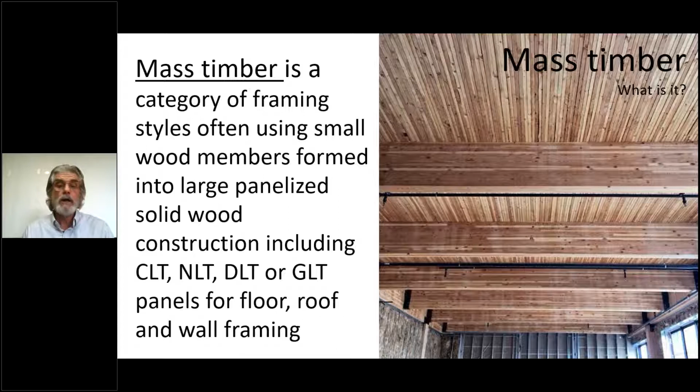So we can see some better examples of exactly what we're looking at. On the left, glue-laminated timber. It would probably be better if that was laying flat in plank orientation, because that's what glue-laminated timber really means. We're looking at a glue-lam beam, but you can lay that down in plank orientation and use it as a floor. One key to note is that it has to be specifically engineered to use if you're going to lay it flat. You can't just take an off-the-shelf glue-lam beam and do that. Engineering has to be checked to make sure that we can do that. It's done very commonly. We've just recently done a couple of projects here in Wisconsin using those type of products, and they work very well.

Cross-laminated timber, I guess that's the one that gets the most press, the elephant in the room so to speak. The one in the middle is cross-laminated timber using solid sawn lams, so you could use a 2x4, 2x6, probably could use wider material. I think most CLT is manufactured with 2x6s. As it says, it's cross-laminated: the first layer lays in one direction, the next layer lays perpendicular after glue is applied, and so on to form a thick panel.

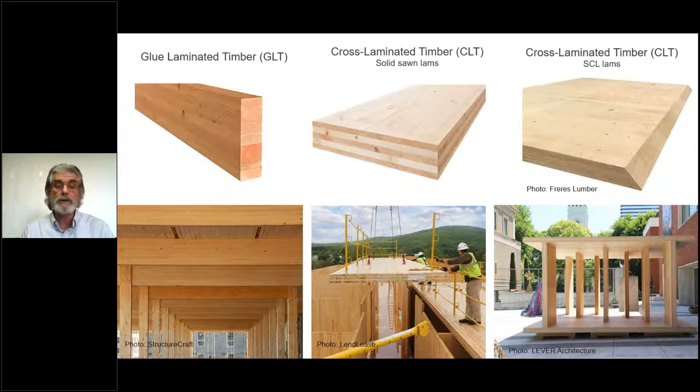And then over on the right, we have a structural composite lamination, or in this case, plywood. Freres Lumber happens to be the only one currently doing this, called a mass plywood panel, which is comprised of thicknesses of 1-inch thick plywood. Down below, you can get a little better sense of how some of these products are used.

We have dowel laminated timber, or DLT. There's only one manufacturer in North America at this time, StructureCraft, as you can see from the photo. Now, StructureCraft actually did the nail laminated timber for the T3 building, the middle slide down below. That's nail laminated timber. But then they decided to start an operation and go into dowel laminated timber.

So it's softwood lumber fastened together with hardwood dowels. That's very similar to the middle slide, which is nail laminated timber, or NLT. Now, nail laminated timber has been around, again, at least for 100 years. It has been in the codes, to the best of my knowledge, at least since 1967. So an engineer can use the National Design Specification and design a nail laminated timber panel.

The dowel laminated timber, however, that is a proprietary technology. So that needs to be looked at specifically on that particular job and that particular use, from a code standpoint and from a usage standpoint.

And then over on the right, we have decking. So we have solid sawn decking, and we have laminated decking, which typically you can get up to about 5 inches thick. That's been around for a long, long time. A lot of information can be found on the decking in the National Design Specification. AWC has some great information on that.

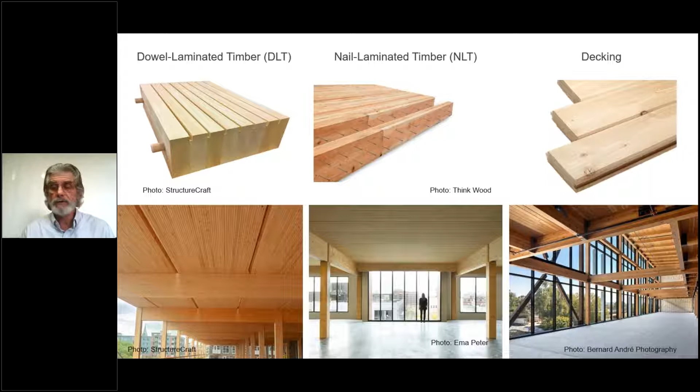Looking down below, we can see an example where you can see the gap between the panels that are laid there of the dowel laminated timber. Middle slide, like I mentioned, is Minneapolis T3. Over on the right, I actually don't know which project that is. I believe it's out on the West Coast. You can see the steel braced frames.

This is just a post and plate. So this is a photo of Brock Commons. Brock Commons is a 18-story university building at the University of British Columbia in Vancouver. It was done about 3 or 4 years ago.

And you can see the absence of the beams here because they used the cross-laminated timber, which has bidirectional strength, and they're able to eliminate the beams in this particular use. This was a dormitory, so they didn't need wide open spans. So this lent itself very well to that application.

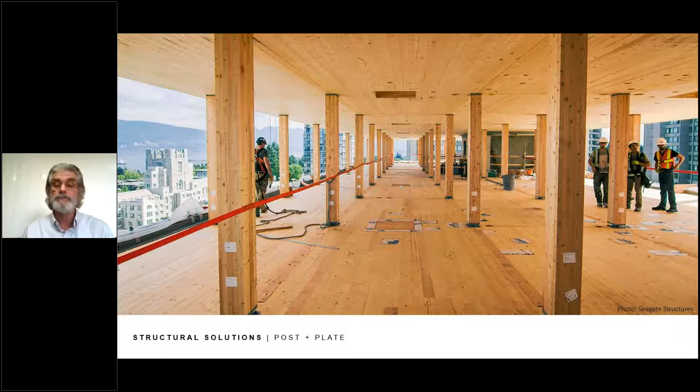This is what we call honeycomb, or this is all CLT. If you look at this, you can see down below, those are all CLT walls that were erected. They're currently setting a CLT floor panel. I think what's notable is you can see how they assembled the fall protection prior to raising the panel in place. Again, this was for speed of construction.

So once they dropped those panels in, workers could actually work above and they could work below because everybody was protected. This particular job is the Redstone Arsenal that was done in Alabama about 4 or 5 years ago now.

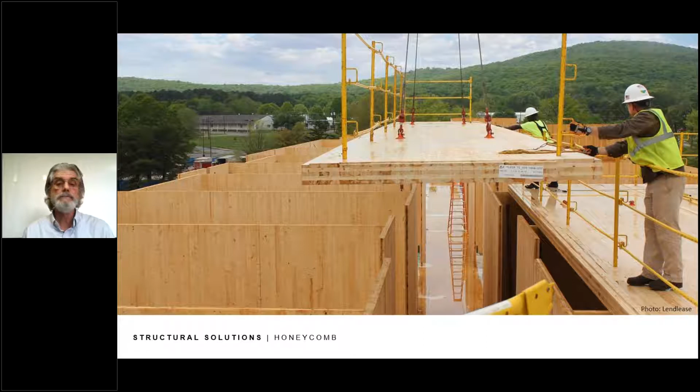So Brock Commons, this is what I mentioned before. This is a precedent project that was done. We're just going to look at a few different projects here to give you a sense for what's been done. This was in Vancouver.

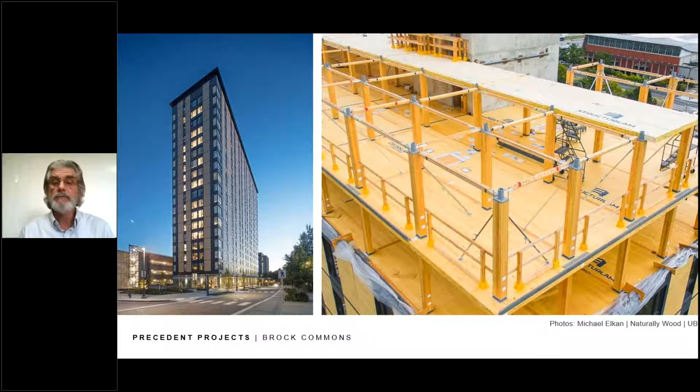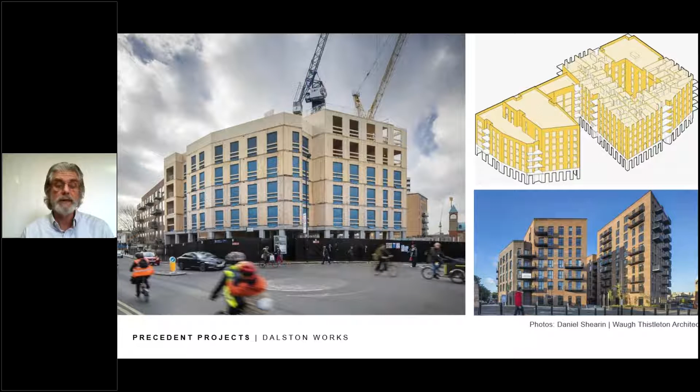Dalston Works - I don't know too much about this. The architect, Waugh Thistleton, back in 2008 did the first CLT building in London. It was an 8-story building over 1 story of concrete apartments, small footprint, all CLT. They've since done quite a few CLT projects. This, to the best of my knowledge, is the largest CLT project currently being done in London, and they've done hundreds of CLT and mass timber projects in London.

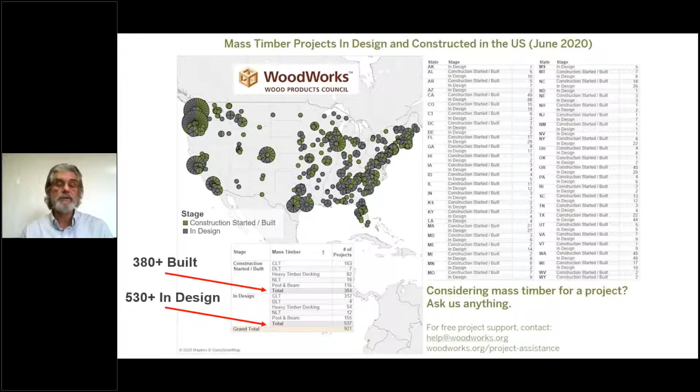Other precedent projects: Carbon 12. This was an 8-story building done about 7, 8 years ago in Portland. This was really the first tall wood building. It's still currently the tallest that I know of in the U.S.

T3 Minneapolis - we mentioned the 6-story wood office building over 1 story of concrete. There's another one under construction, pretty close to being finished, in Atlanta, and there are other ones on the books that will be happening.

111 East Grand in Des Moines - all of these projects, by the way, Woodworks has been involved with in one way, shape, or form. I worked with the architect and Ryan Companies on this particular project, and they actually occupy this office building now. We'll see one more slide of East Grand. So that was the dowel laminated timber panels.

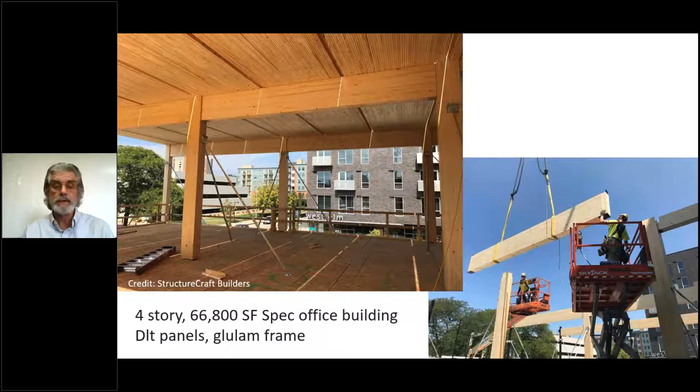Bullitt Center was done around 2013. We saw a previous slide of this Living Building Challenge certified building - 2x6 nail laminated timber deck, 2x4 roof deck.

And even in Brooklyn, New York - so this is being done everywhere. New York, I believe, will be a hot spot from what I understand. Our engineer out there who works on a lot of these projects - they're kind of getting a foothold and things are happening. There's a couple other projects I'll mention that I don't actually have photos for.

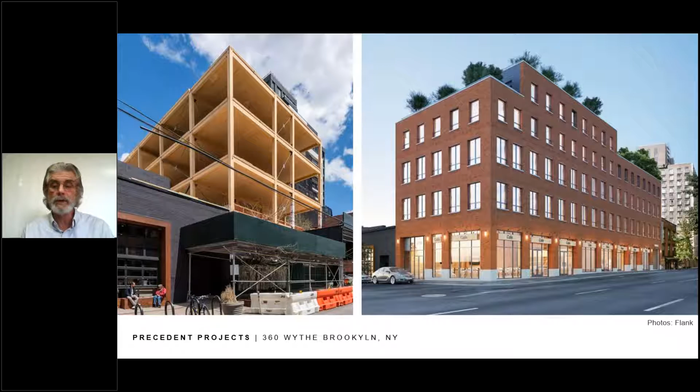One is the Ascent building in Milwaukee, a 25-story mass timber building that has started construction - it's started groundwork, right in downtown Milwaukee. That currently will be the tallest mass timber building in the world, so that's really a high-profile building. It's been very cool to be involved with that. Another one under construction is the Intro job, a 9-story building in Cleveland, also under construction right now. So there's things happening in the Midwest here too.

So moving on, the 2021 IBC - we do have 3 new construction types that are going to allow us to go taller than current code does. So 4A, 18 stories, 4B, 12 stories, and 4C, 9 stories. We do have a lot of information on this available.

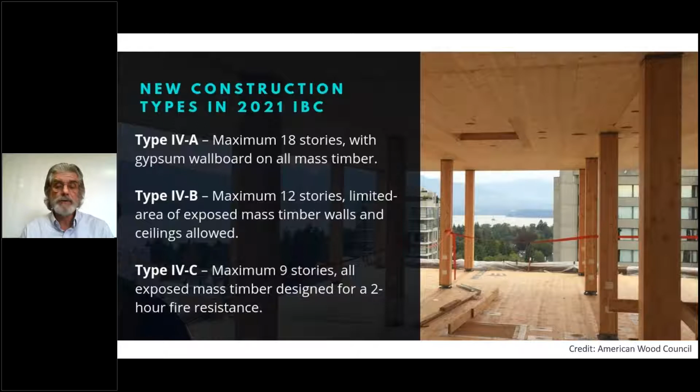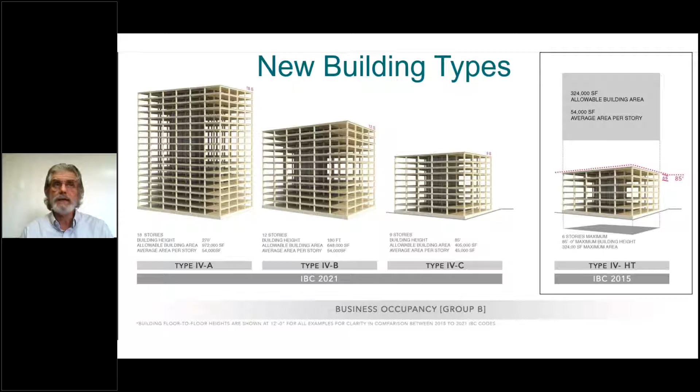So this gives you a little pictorial of what those building types are like and what will be happening. Now, Washington and Oregon have adopted this code. Denver has adopted this code. I'm working with other people using provisions from this code to do buildings. So it's well on its way, and it should be in hard copy here anytime soon.

We do have some information on our website regarding the 2021 IBC. I would suggest that anybody interested in wood construction look at our website, woodworks.org - there's just a ton of information available there. The other one I'd mention, a partner organization of ours, is the American Wood Council, awc.org. Another website of note would be thinkwood.com - just a lot of information to be had there.

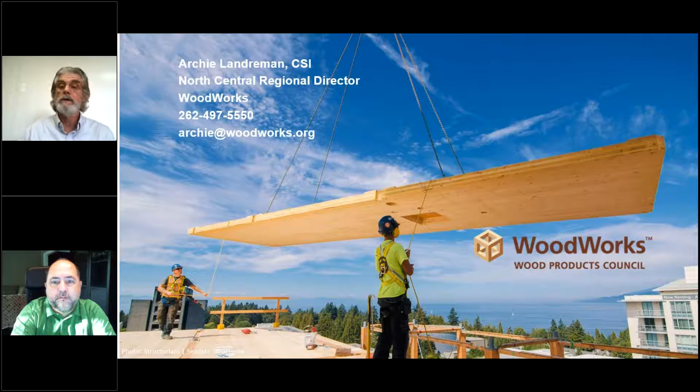We get to come down a little bit from Archie's super high view of mass timber to something more granular as to the design process at Michigan State University, starting off with why timber. We've talked about this in other sessions, but we wanted to reiterate some of the reasoning why we chose to go with the mass timber route. It wasn't done in a vacuum just with the thought of mass timber alone, without looking at some other metrics.

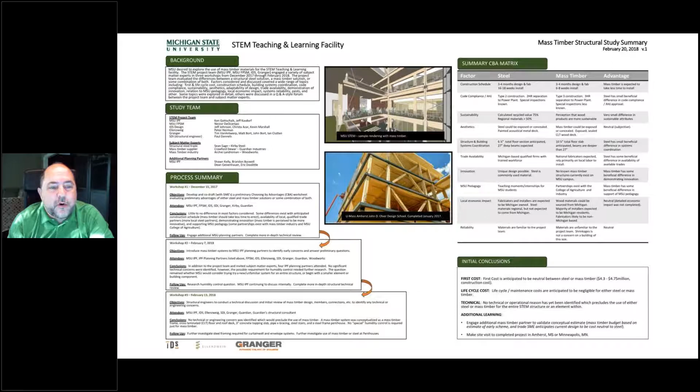This is a slide we produced for the executive steering committee on the project, using almost a choosing-by-advantage matrix for steel versus mass timber, to see which had the advantage and what was the right solution for MSU, for the STEM building, and for the project overall. We went through this process to solidify and justify the use of a new technology for Michigan State University.

Next, when you start moving into something new, is how does the code authority see it? With the STEM building, the primary code authority is the State of Michigan's Bureau of Fire Services, which works under NFPA 101, the 2012 edition. We joined with them early on in the process, even before we made a full commitment to mass timber, to help us decide what type of construction this is - type 3 or type 4 construction - and what are the pluses and minuses of each.

Type 4 construction, the traditional heavy timber type, seems like the obvious choice, except when you read the fine print, where it limits you on concealed spaces and things going on within the building. Because we had certain spaces where we wanted ceilings, and we wanted to enclose our shafts for the chemistry and fume hoods, the State of Michigan Bureau of Fire Services determined this was probably more of a type 3 building - 3B, in fact, because our footprint size met the area requirements for the code.

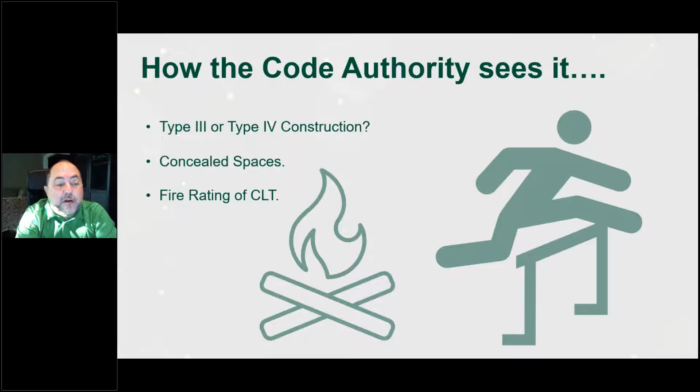So now what? We've made a commitment, we've got information from the code official, and we look at what we're doing - wood or steel primary structure? In the case of the STEM project, it became both.

On South STEM in particular, due to the heavy mechanical loads for the chemistry and biology labs, the size of the air handling equipment up in the penthouse got quite large, inducing strong vertical loads down through the building. We determined we would use steel for those columns in specific, surgically placed locations within the building, to keep the column size from taking too much space out of the usable area.

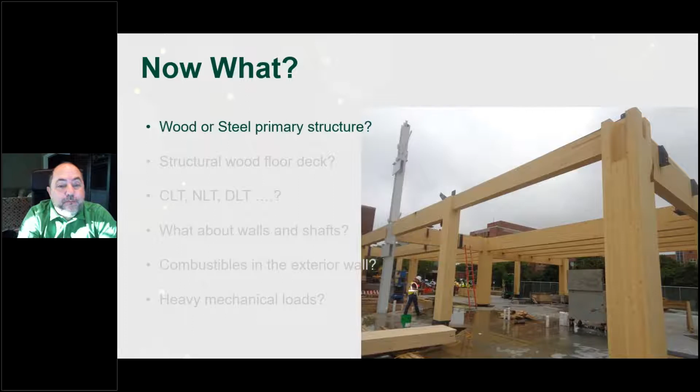But that meant we had to introduce more wood members for the beams, but it solved some inherent problems that they had at University of Massachusetts with their composite floor slab. Next.

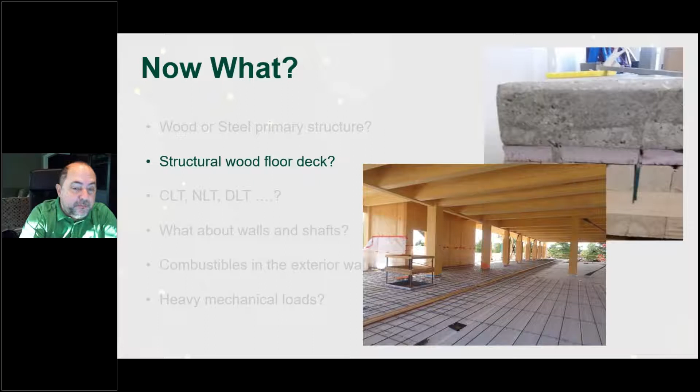And what kind of floor? Archie was talking about, well, how do you do this? Do you do it with CLT, NLT, DLT? What is the floor structure going to be? This became a little bit a function of our discussion with our mass timber provider as to what they traditionally work with and how they work. We had some thoughts of going with nail laminated timber to help with some acoustics.

To be able to stagger the bottoms of the beams in height in order to break up the sound in the labs. That became less and less of an issue as we worked through the design, and so we decided to go with the more panelized construction and take care of those efficiencies, and ended up with CLT floor decks of a 4-ply situation, which is a little different than usual. And it was 4-ply due to vibration concerns for the long spans in these open labs. Next slide.

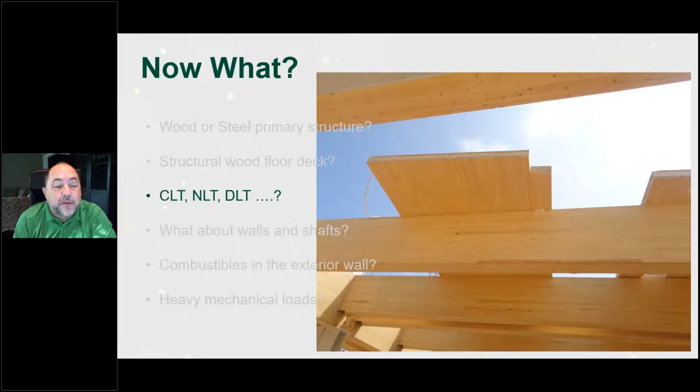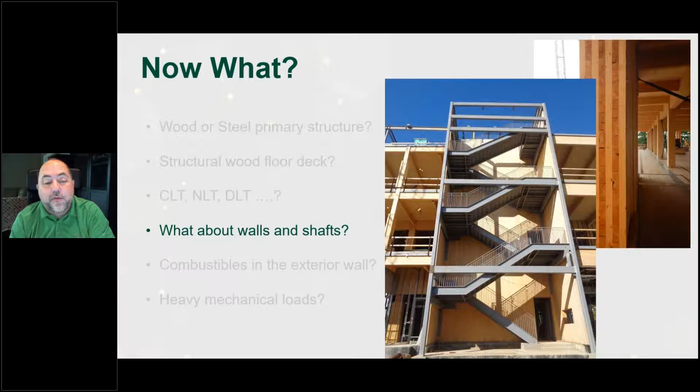But we chose not to use the shafts, and we could have done shafts with CLT as well, but we chose not to for future access to get into and make changes to the building as it's used. This is a 100-year building for the university. We wanted to keep it a way that they could operate in the building and make it continually work for them. Next slide.

Combustibles in the exterior wall. I think Pete will talk about this from SCI a little bit in his talk, but one of the things with type 3 construction is if you have an exterior load-bearing wall, it needs to be non-combustible. And anytime it gets over, I think, 200 pounds a linear foot of support, it's considered a load-bearing wall. Well, with our facade, we had more than that weight, and we couldn't introduce the wood timber into the exterior wall, or otherwise we would have had to rate all of the wood timber to create that 2-hour fire rating of a load-bearing exterior wall.

So as the walls are non-load-bearing per the definition in the building code, we were able to keep the structure lighter as we did, but we had to introduce this exoskeleton of steel to help support the brick and the precast and the glass that will be going on the building here in the near future, or actually is in the South STEM building right now. Next.

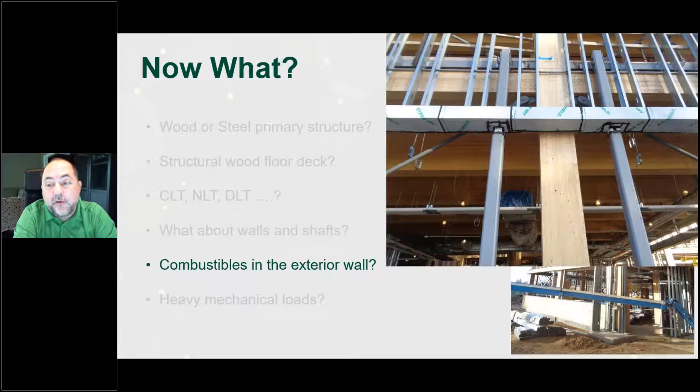And having mechanical loads, how do you handle the weight and the difference? We wanted to keep repetition in the bays in the lab so they looked similar and were uniform. And when you start getting the mechanical equipment up in the penthouse, it has very specific requirements for support, and we chose to do that out of steel to help with the steel member side, with the member sizes and the bay spacing, and also as an isolation from the penthouse to the 3rd floor, doing that with the steel structure hovering just above the columns and the wood deck that is the roof deck of the 3rd floor. So we chose to use a hybrid based on where, as Archie says, where wood makes sense and where steel makes sense in order for the building to perform as well as possible.

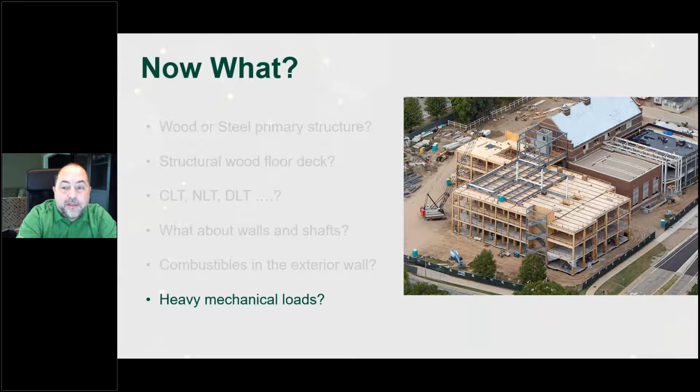I'll start my portion out with a bit of a detour. I came across this quote. A crude analysis is that Thoreau, the American philosopher, along with his contemporaries, believed that knowledge or truth could be found simply by spending time in nature. And in Thoreau's case, in the 19th century, this literally meant in the forest amongst the trees. So I think it's fair to say that 200 years later, the MSU STEM project would have interested Thoreau, and he may well have been a supporter of mass timber construction. Next slide, please.

I'd like to focus my time this morning on the unique considerations for the structural engineer when designing mass timber. And I'll start with member materials and member sizes.

Initially, when we began the design process, once mass timber had been selected for the project, one of the first questions we asked ourselves before we could size members and evaluate was, what are the proper material properties? So we did a lot of investigation into what is available, what kind of material strengths we could achieve from the primary suppliers. Those are some of the early questions that we worked with Woodworks on.

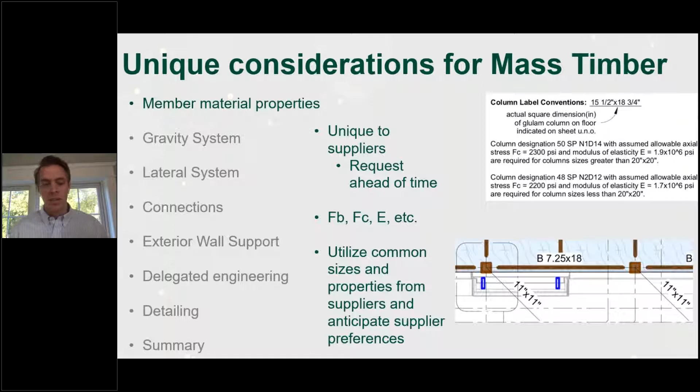Next slide, please. The next unique set of considerations is the gravity system. As Archie and Kevin talked about, what is the choice for decking? Is it NLT? Is it CLT? Is it GLT? CLT has some unique advantages, one of them being dimensional stability.

The layups in the CLT are positioned in such a way that the panels themselves are dimensionally stable. So there's very little concern with CLT in terms of shrinkage or movement during construction or during the occupied building. Considerations like joint spacing, joint location, and size of joint to deal with shrinkage are just less of a consideration with CLT.

How thick is the panel? What is the span? Architecturally, what is the desired spacing of the beams? What is the bay size? At MSU STEM, the real driving factor in a lot of the design was the minimum bay size for the classroom spaces, dealing with a 40 by 40 open space that needed to be column free. That drove a lot of considerations in terms of the panel thicknesses, the beam depths, and the beam spacings. Another important consideration is floor penetrations.

What kind of floor penetrations are you looking at? Is it residential, where you're looking at things like showers, toilet drains, those kinds of things? Or is it a student academic laboratory facility like MSU STEM, where there are lots of floor penetrations for lab equipment, sinks, that don't necessarily stack from floor to floor, but there may also be a lot of dedicated shafts, which we also had at MSU STEM.

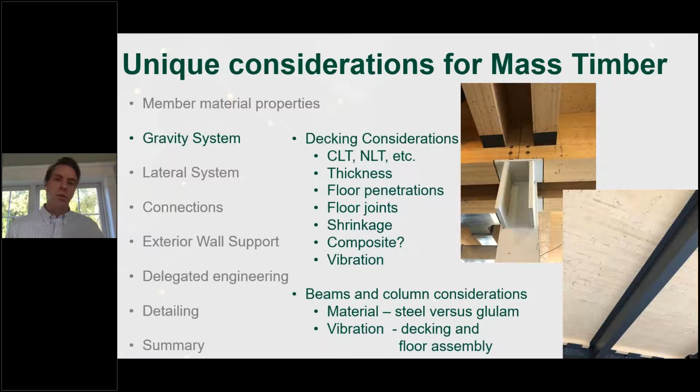From a design standpoint, the strength of the diaphragm is consistent with that of a normal plywood diaphragm. It's governed by the capacity of those splines. However, it's much more than just a plywood diaphragm—it's got considerable thickness. So on MSU STEM, our design considered both a flexible diaphragm approach as well as a rigid approach, to make sure we captured the possible behavior of both types of stiffnesses.

Another important consideration is load path. Unlike concrete and steel, these components and the way forces are developed through them really relies on a lot—nothing can be taken for granted. The fasteners that connect these components are dowels, screws, and bolts, which really require the engineer to think about how forces are moving between lateral system components.

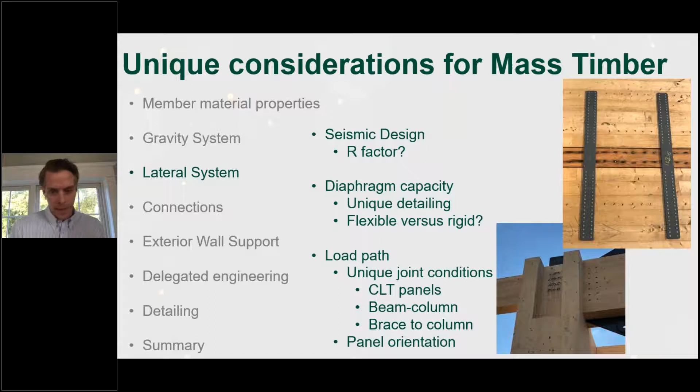Another important consideration is your connections, and first off, connection style. Unlike steel framing, concrete framing, or conventional wood framing, most or many of the connections in mass timber are exposed. So it's important to have a conversation with your designer and the owner early on to establish an understanding of what the connections are going to look like.

There's also a difference in how forces are developed through connections. Unlike conventional concrete or steel to steel, mass timber very frequently develops forces through bearing, shear, and screws. That introduces unique considerations in how members and components are designed—issues like eccentricity become a consideration.

We work with Nordic's connection engineers to develop an understanding between ourselves and them on how forces are being transferred from the floor beams into the girders, in such a way that the girders are not twisted—so the forces develop concentrically into those girders.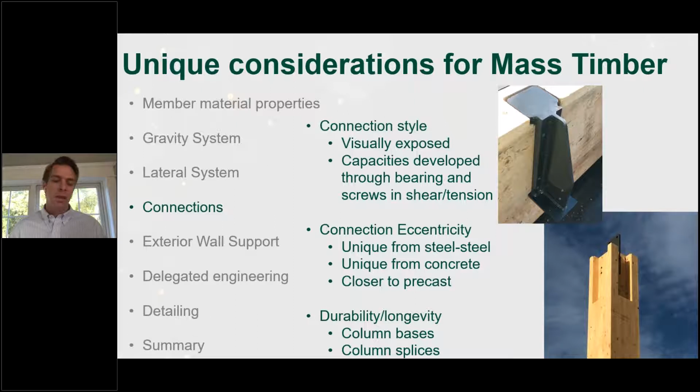Longevity and durability are also considerations. If the connection is exposed and low to the ground, is it going to be exposed to water as people enter the building? Is it going to be exposed to chemical cleaning agents during the life of the building? So those are also considerations.

There's shafts or rooftop openings located at the roof level. There's anchorage of the facade that's necessary, but also consideration of the panel joint locations near the edge. That heavy black line running up and down the photo is a panel joint in the CLT. The gray rectangles along the edge are actually connection points of the facade. So to anchor the facade, the load really needs to move around the shafts and between panels.

That's really a unique consideration depending on the side of the building—whether the panel joints are parallel or perpendicular to the edge, but also whether there's a slab step, or an opening in that diaphragm where the load really needs to move around. So consideration of panel orientation and joint location—is there a joint 2 feet from the edge of the slab or deck, or is it 8 feet away? Is there a slab step? Those are important considerations in design as well.

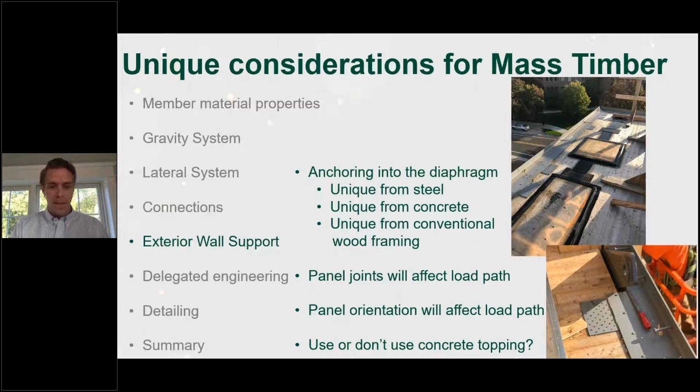Another important topic that's unique is the amount or extent of delegated engineering. I think a good way to think about it is that the responsibility for the member sizes, the design of the members, the column sizes, the beam sizes, the brace sizes, the CLT thickness—that responsibility really is best placed with the engineer of record, the design engineer.

How those components connect together is frequently a good choice or an opportunity to provide flexibility for the fabricator. Rather than detailing out all of those connections, providing for fabricator preference, erection preference, connection and fastener preference is really important. In the case of MSU STEM, we provided Nordic with beam shears, column uplift forces for splicing, brace forces, and connection forces, so they could take those components and tie them together to complete the load path. That wasn't something we felt was best suited to be fully detailed on the documents—we communicated more of the intent and the forces to complete that load path.

Other kinds of forces that are important on the documents are forces for bracing those exterior walls, and diaphragm shear demands. These are all things that fabricator preferences can introduce efficiency into the overall product.

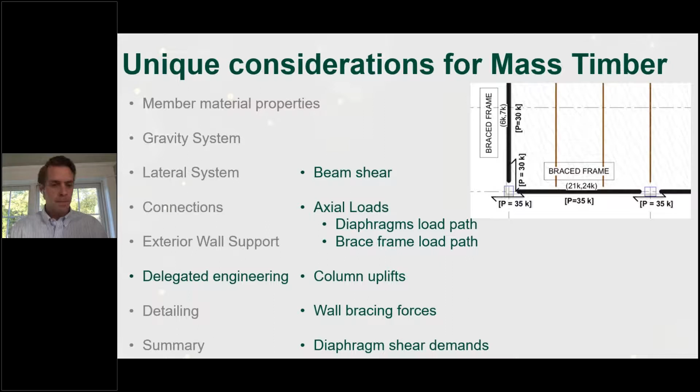A couple other important themes - back to connection style. You're looking at in a mass timber structure more exposed connections. So are the owner and the architect looking for something more modern and sleek, or are they looking for more of the heavy industrial look? Archie shared slides that really span that spectrum of different types of style and aesthetic.

Other considerations are fabricator preference. Does the fabricator or the erector prefer dowel type fasteners, bolts, screws, nails? There's a variety of options, but the fabricator's preference may, on a project the size of MSU STEM, be the most important consideration, along with constructability preferences. So balancing connection style, fabricator preference, and load demand are important in mass timber.

One other consideration is durability. Is it something that could easily be damaged over the life of the structure, or deteriorated? Could the look of the connection or the column base be affected over time? Those are important considerations as well.

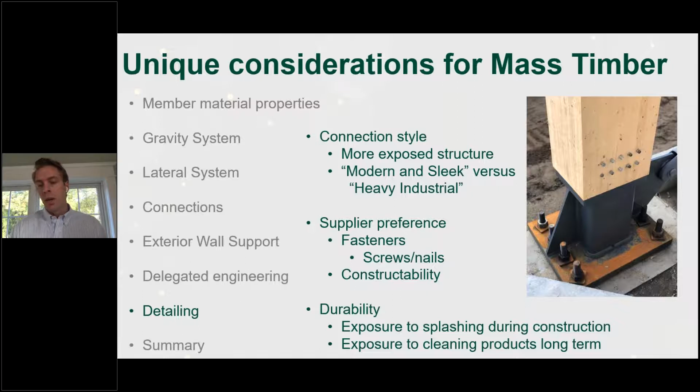Next slide, please. So in summary, as a structural engineer approaching a mass timber building, I think it's important to pay careful attention to the load path of your forces moving through the building and the connection components. Pay special care in the detailing, visibility, durability, and fabricator preference.

And one other item that I didn't touch on, but we will touch on more with Bill and John Mark, is trade coordination. The photo we're looking at on the screen really shows the complexity of trade coordination. We're looking at a steel skeleton for support of the heavy masonry facade. We're looking at steel introduced on the edge of slab for support of that facade. We're also looking at the mass timber columns themselves, but those have steel bases below.

So one of the things that our team did for the MSU STEM project is try to provide clarity to the CM and to the bidding contractors on where responsibility fell. On our documents, we used colors to communicate scope responsibility - for example, connection components and steel components shown in blue represented scope that fell with the mass timber supplier, where steel components shown in black fell with a steel subcontractor. Sometimes those components ended up in the same detail, and coordination between those trades ended up being necessary.

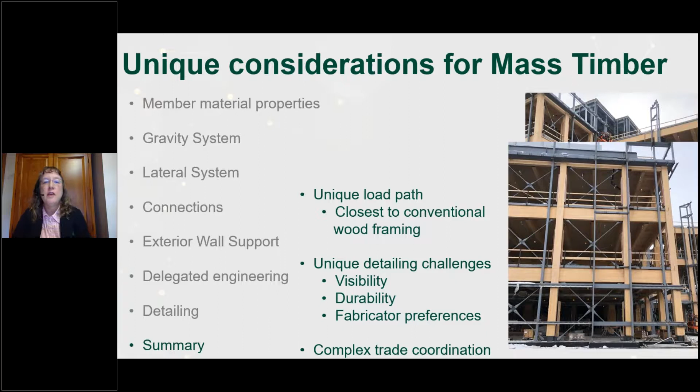Okay, first question is for Archie. What is the breadth of project types that can use mass timber - just limited to office and multifamily residential type buildings? Any commercial, industrial, or transportation types of applications?

Now I'm not muted anymore. I had to take care of that.

Yeah, that's a great question, because interestingly enough, we're actually doing a presentation tomorrow. One of our engineers has gone through and looked up doing tilt-up construction with mass timber. So I guess the simple answer is it's really up to your imagination what you can do, but it's obviously restricted by practicality and economics. So mass timber has the potential to be used in all types of buildings, depending on certain limitations. But I think the trick is to say, what really makes sense - it just needs to be looked at that way.

Okay, thanks. Kevin, this is for you. Could you tell us a bit more about the decision matrix for the choice between timber versus steel frame for the MSU building?